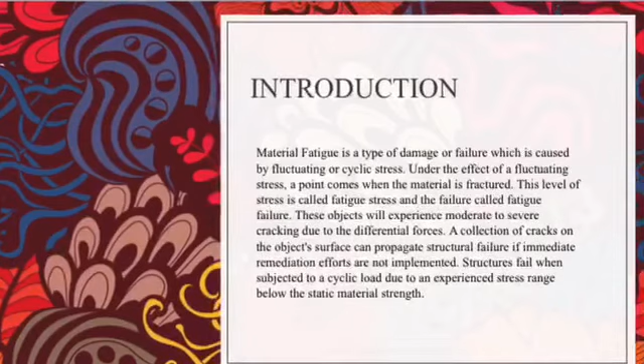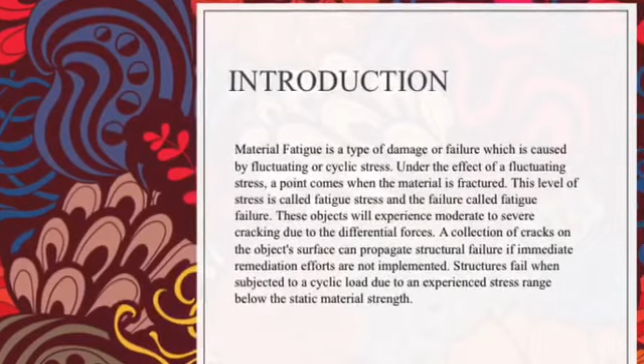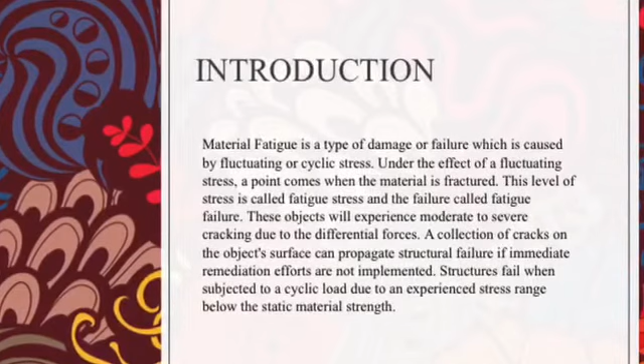Material fatigue is a type of damage or failure caused by fluctuating or cyclic stress. Under the effect of fluctuating stress, a point comes when the material fractures. This level of stress is called fatigue stress, and the failure is called fatigue failure. These objects will experience moderate to severe cracking due to differential forces. A collection of cracks on the object's surface can propagate structural failure if immediate remediation efforts are not implemented. Structures fail when subjected to a cyclic load due to an experienced stress range below the static material strength.

The next slide presents the background study of fatigue material. Firstly, in 1837, Wilhelm Albert published the first article on fatigue. He devised a test machine for conveyor chains used in Clausthal mines.

Next, in 1842, William John Macquorn Rankine recognized the importance of stress concentrations in his investigation of railroad axle failures. F. Braithwaite reported on common service fatigue failures and coined the term fatigue in 1854. In 1903, Sir James Alfred Ewing demonstrated the origin of fatigue failure in microscopic cracks.

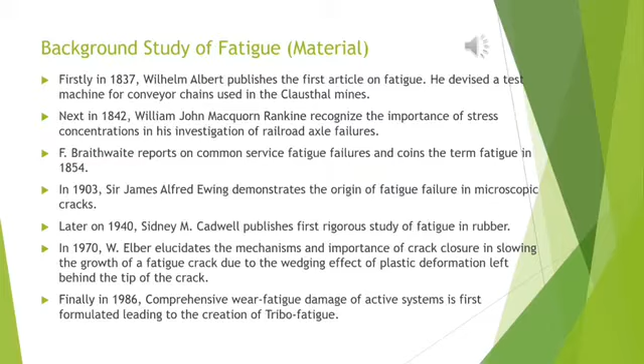Later, in 1940, Sidney M. Cadwell published the first rigorous study of fatigue in rubber. In 1970, W. Elber elucidated the mechanisms and importance of crack closure in slowing the growth of a fatigue crack, due to the wedging effect of plastic deformation left behind the tip of the crack. Finally, in 1986, comprehensive wear fatigue damage of active systems was first formulated, leading to the creation of tribo-fatigue.

Characteristics of fatigue in metal alloys: for the simplifying case when there are no macroscopic or microscopic discontinuities, the process starts with dislocation movements at the microscopic level, which eventually form persistent slip bands that become the nucleus of short cracks. Macroscopic and microscopic discontinuities at the crystalline grain scale, as well as component design features which cause stress concentrations, such as holes, keyways, sharp changes of load direction, are common locations at which the fatigue process begins.

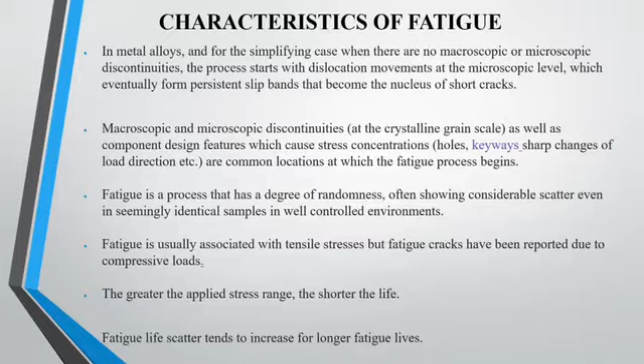Fatigue is a process that has a degree of randomness, often showing considerable scatter even in seemingly identical samples in well-controlled environments. Fatigue is usually associated with tensile stresses, but fatigue cracks have been reported due to compressive loads. The greater the applied stress range, the shorter the life. Fatigue life scatter tends to increase for longer life. Damage is irreversible; materials do not recover when rested.

Fatigue life is influenced by a variety of factors such as temperature, surface finish, metallurgical microstructure, presence of oxidizing or inert chemicals, residual stresses, and scuffing contacts. Some materials exhibit a theoretical fatigue limit below which continued loading does not lead to fatigue failure.

High cycle fatigue strength can be described by a stress-based parameter. A load-controlled servo-hydraulic test rig is commonly used in this test, with frequencies of around 20 to 50 Hz.

Lastly, low cycle fatigue is associated with localized plastic behavior in metal. Thus, a strain-based parameter should be used for fatigue life prediction in metals. Testing is conducted with constant strain amplitudes, typically at 0.01 to 5 Hz.

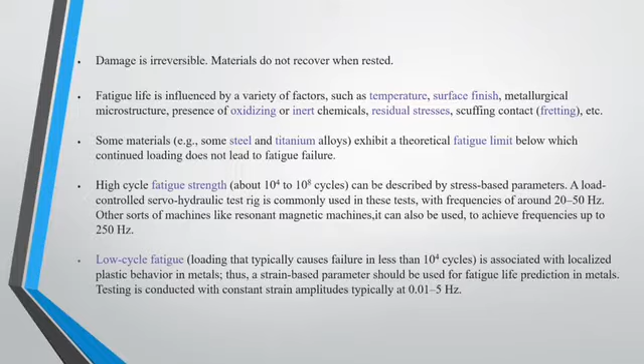Stage of fatigue happens when the material is under repeated stress having a maximum value less than the tensile strength. Fatigue has been separated into regions of high cycle fatigue, which requires more than 10 to the power of 4 cycles to failure where stress is low, and low cycle fatigue, where there is significant plasticity.

There are three stages of material fatigue: the first stage is initiation, the second stage is propagation, and the third stage is final rupture.

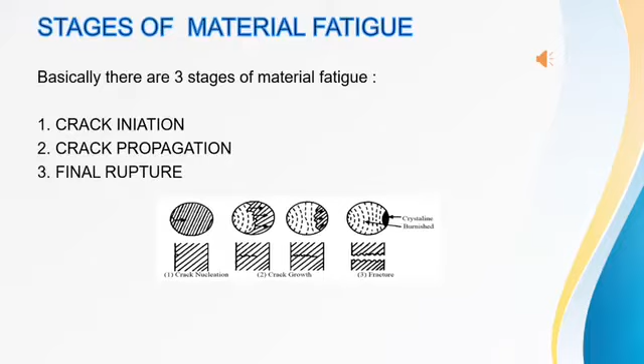So the first one is crack initiation. Crack initiation is the most complex stage of fatigue fracture. The most noticeable factor due to fatigue fracture is an irreversible change in the material, such as metal, caused by repetitive shear stress. The accumulation of micro changes over a large number of applications is called cumulative damage. This cumulative damage becomes the main factor that causes crack initiation in the material.

This stage is said to be unpreventable. This step can also be bypassed entirely if the crack forms at a pre-existing stress concentrator, such as from an inclusion in the material, or from a geometric stress concentrator caused by a sharp internal corner or fillet. At the beginning, the area undergoing cracking is very small, never extending more than 2 to 5 grains around the beginning.

After the material experiences the first stage, the propagation stage will happen automatically. The rate of crack growth is primarily driven by the range of cyclic loading, such as mean stress, environment, and short crack effect.

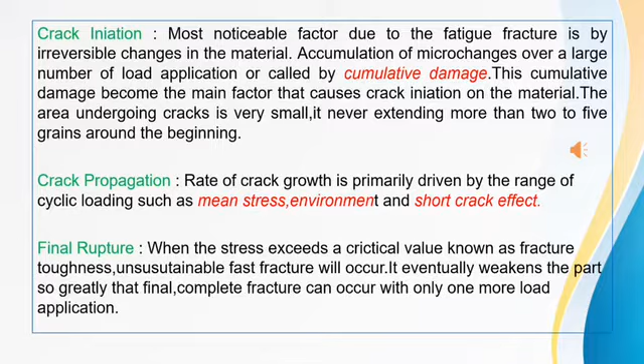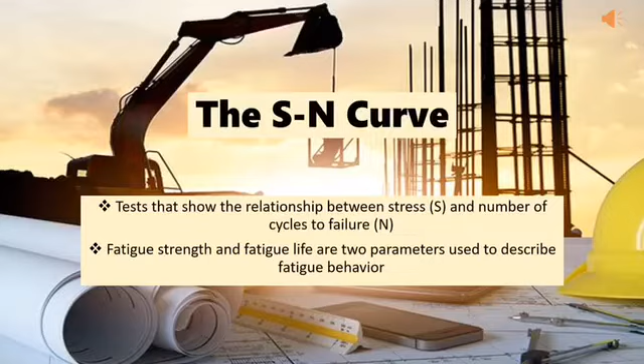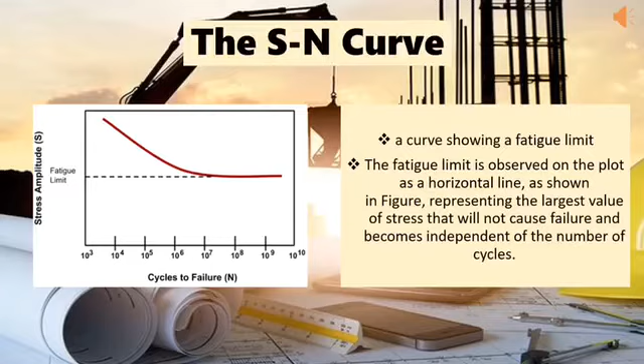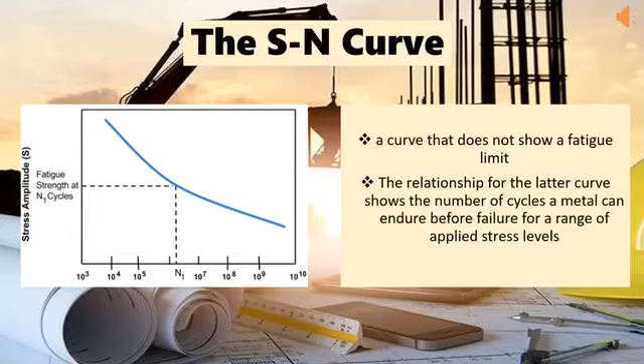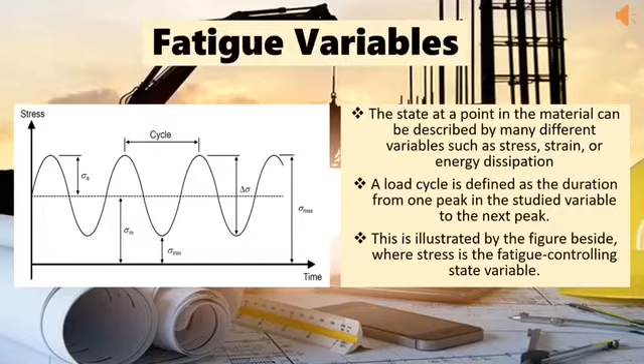Fatigue variable: the state at a point in the material can be described by many different variables such as stress, strain, or energy dissipation. A load cycle is defined as the duration from one peak in the studied variable to the next peak. This is illustrated by the figure beside, where stress is the fatigue controlling state variable.

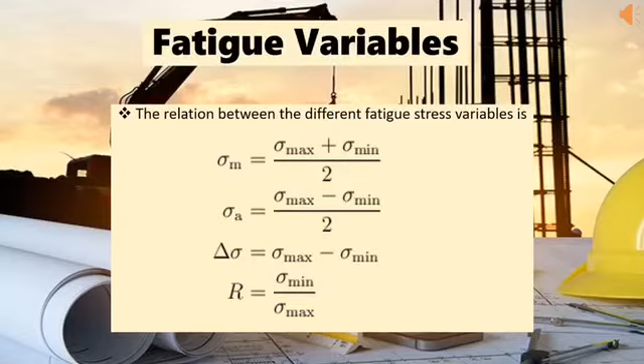And this is the relation between the different fatigue stress variables. Next, the slide that I will present is experiments on fatigue material.

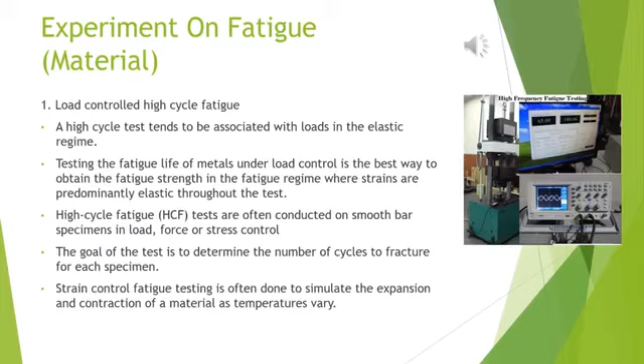The number 2 experiment on fatigue material is the strain control low cycle fatigue experiment. The test is run in strain control with the load as a dependent variable. Low cycle fatigue is characterized by high amplitude, low frequency plastic strains.

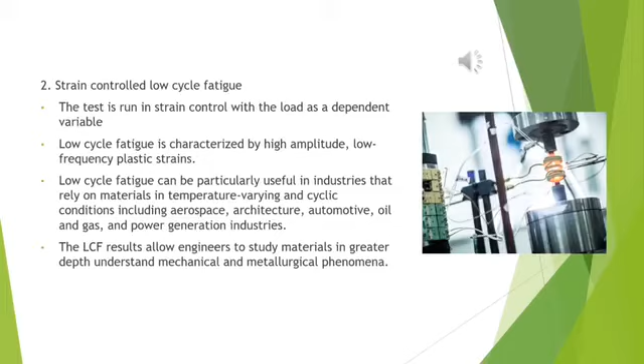Low cycle fatigue can be particularly useful in industries that rely on materials in temperature varying and cyclic conditions, including aerospace, architecture, automotive, oil and gas, and power generation industries. The LCF results allow engineers to study materials in greater depth and understand mechanical and metallurgical phenomena.

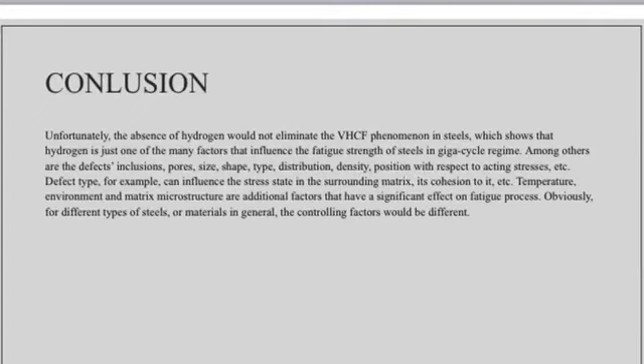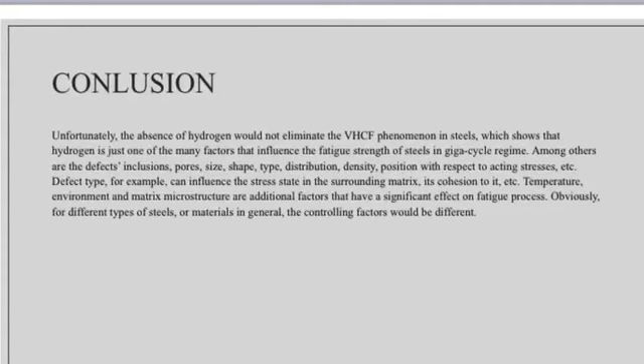Unfortunately, the absence of hydrogen would not eliminate the VHCF phenomenon in steels, which shows that hydrogen is just one of the many factors that influence the fatigue strength of steels in the gigacycle regime. Among others are defects, inclusions, pores, size, shape, type, distribution, density, and position with respect to acting stresses.

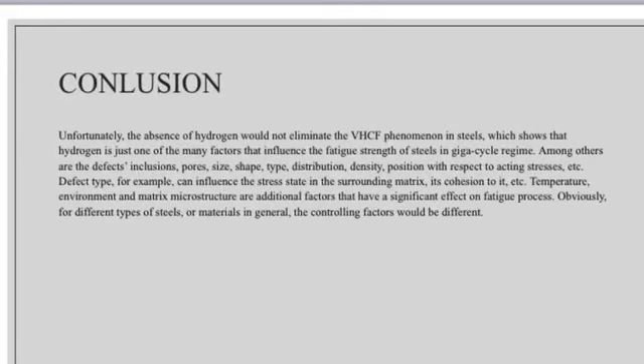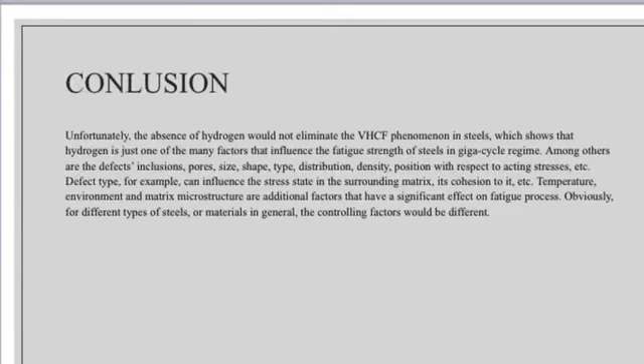Defect type, for example, can influence the stress state in the surrounding matrix and its cohesion to it. Temperature, environment, and matrix microstructures are additional factors that have significant effect on the fatigue process. Obviously, for different types of steel or materials in general, the control factors would be different.